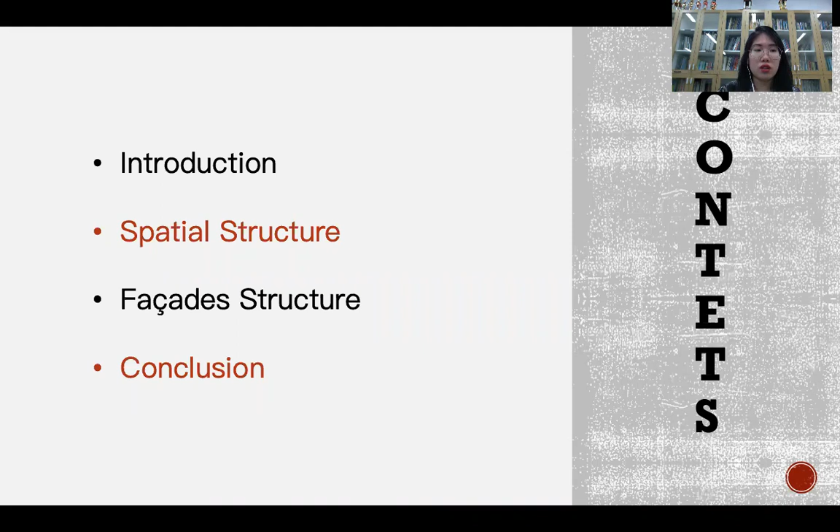Before jumping deep into the research, I would like to introduce some background that established this research. The true meaning of globalization is about increasing interrelation experience. Many have been gradually losing one's own cultural identity due to globalization. Jakarta, as the capital city of Indonesia, is no different. Local culture here has become a sightseeing spot rather than a part of their life. In 2019, the capital city was announced to be moved to Kalimantan on Borneo Island, with one of the criteria being to ensure the local culture.

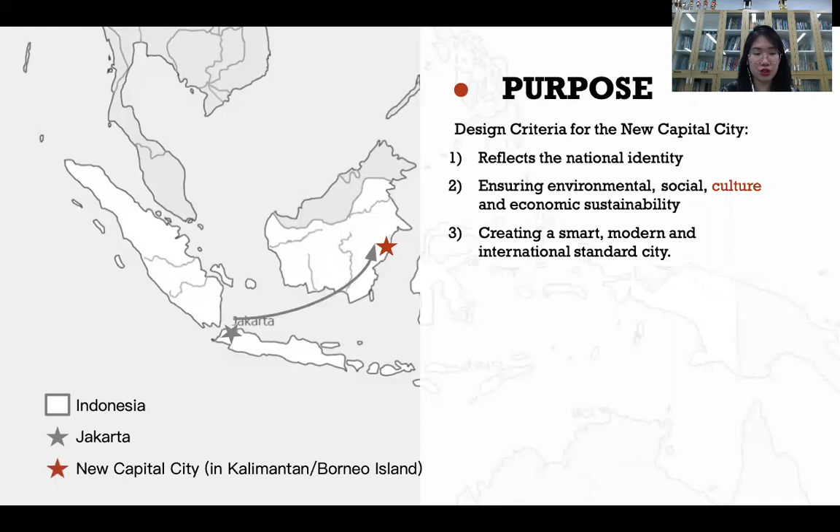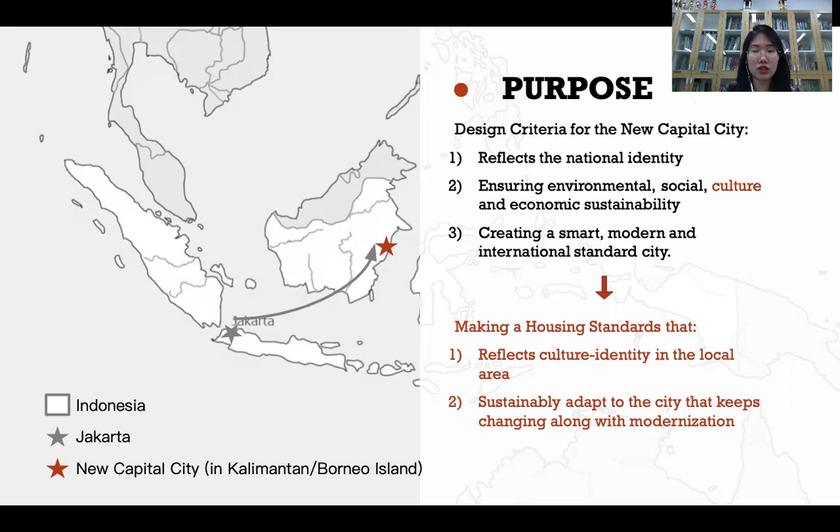With that criteria in mind, the purpose of this study is to find housing standards that reflect cultural identity in the local area, sustainably adapting to the city that keeps changing along with modernization.

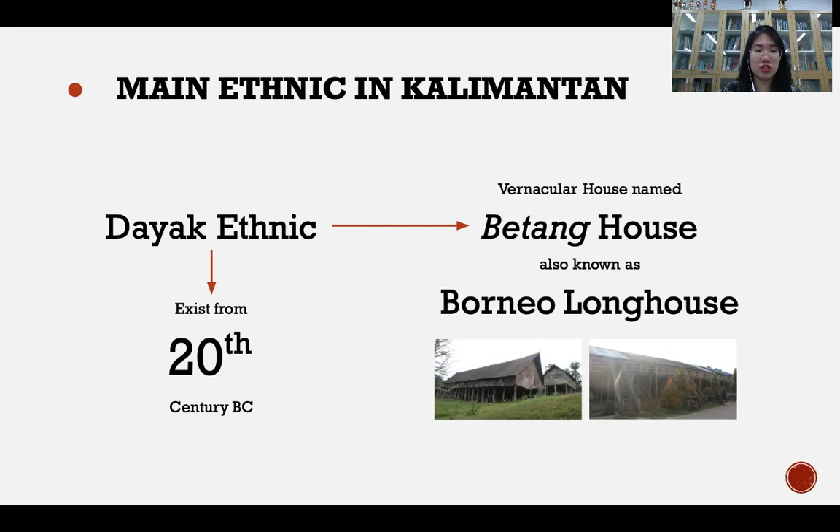For that, we analyzed the vernacular housing in Kalimantan, specifically the Dayak ethnic. Dayak is considered the main ethnic in Kalimantan, as they have lived on the island from the 20th century before Christ, acting as the indigenous group. Their housing is called Betang, or also known as Borneo Longhouse. Just like the name, it is a house in a longitudinal shape and built on stilts.

The vernacular houses will be analyzed based on their spatial structure and elevation proportion to learn the values of the people and how the house develops based on the environment and climate. The results of the analysis will then be considered as housing design standards.

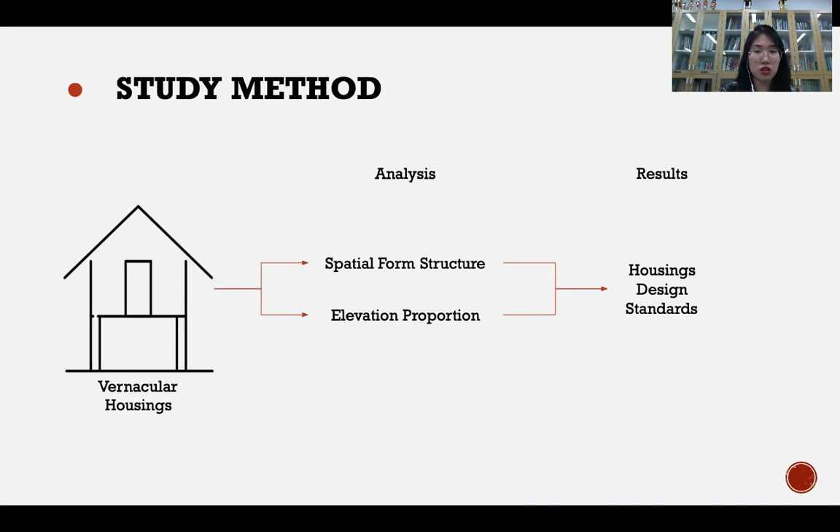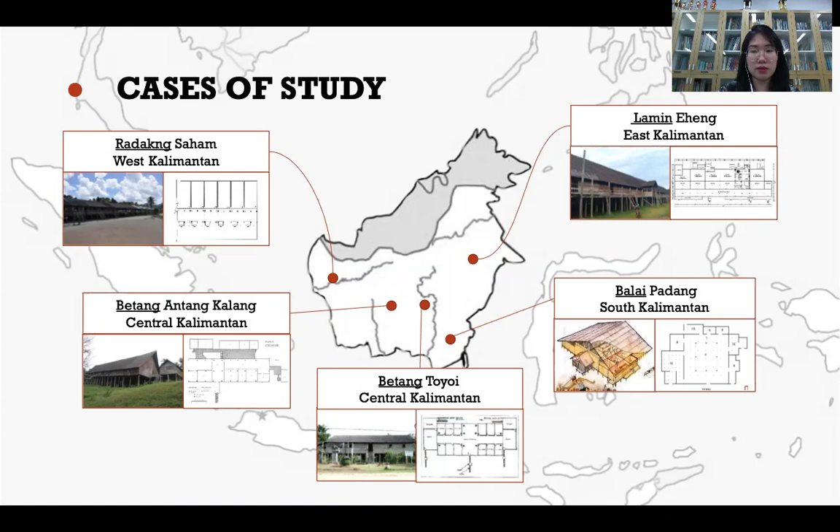For this study, we have 5 cases coming from 4 different areas, which are east, south, west, and central Kalimantan. First is the analysis of the spatial form structure.

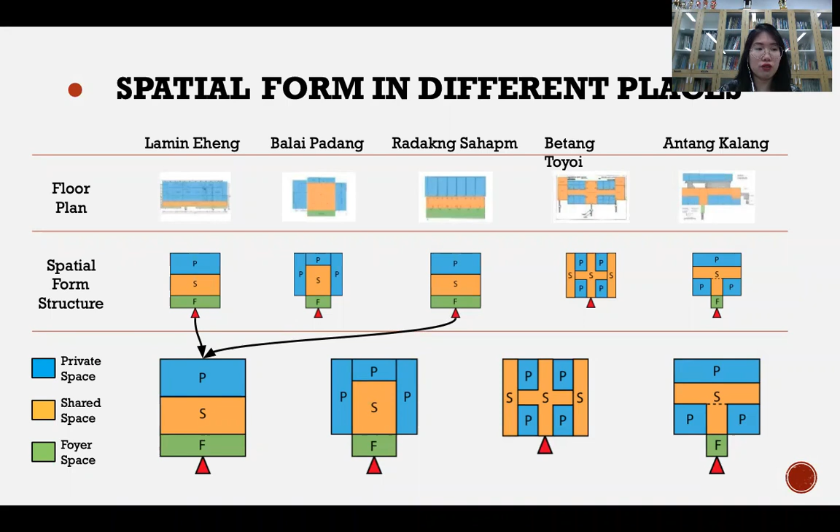The vernacular houses usually consist of 3 parts: the foyer, shared, and private spaces. The way the spaces are connected constructs different formations. Lamin Eheng and Radakng Saham have the same form, obtaining a total of 4 forms. The complicated form is broken into FS and SP relations for better analysis.

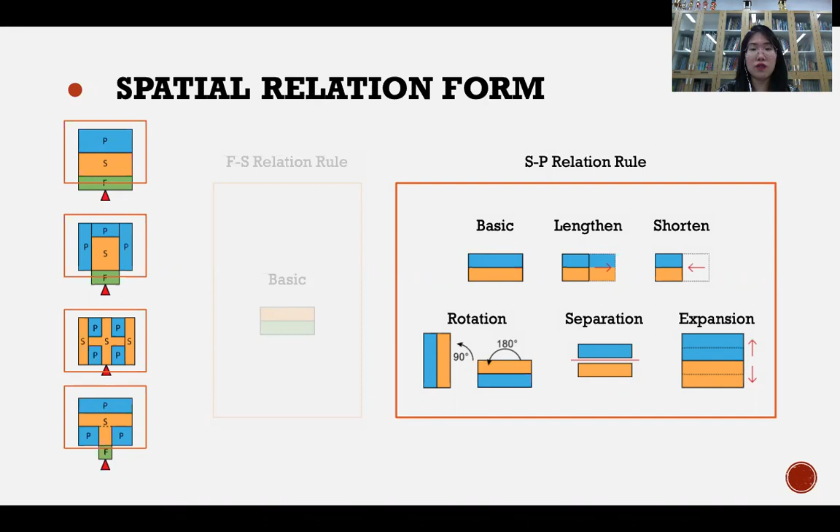For the FS relation, the form is constant—every type has the same basic form rules. As for the SP relation, each type has its own unique form, and these complicated forms can be constructed by adding some of these rules. For better understanding, the SP forms are segmented to reveal the basic form, which determines the types of form structure in these cases.

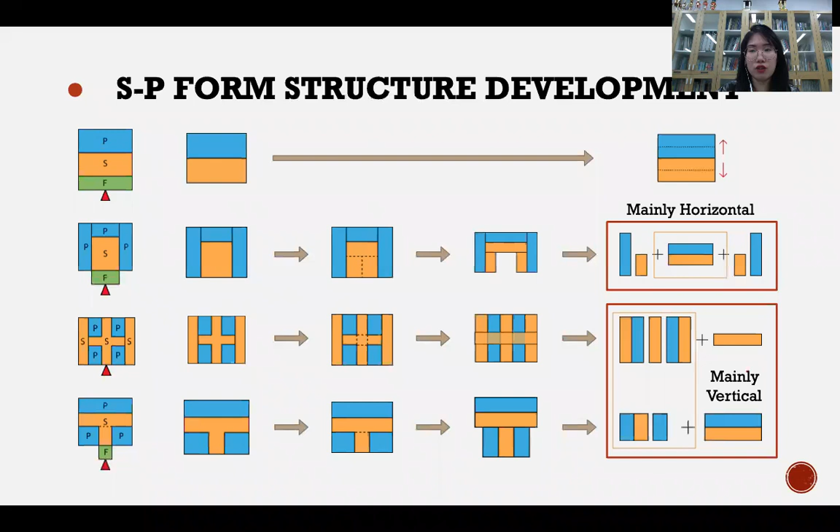Notice that in the second case, the pattern differs from the third and fourth cases. The second is mainly structured by a horizontal basic form with addition of vertical units, while the others are the opposite—mainly vertical basic form with addition of horizontal units. Putting it all together, we obtained 3 different types of form structure.

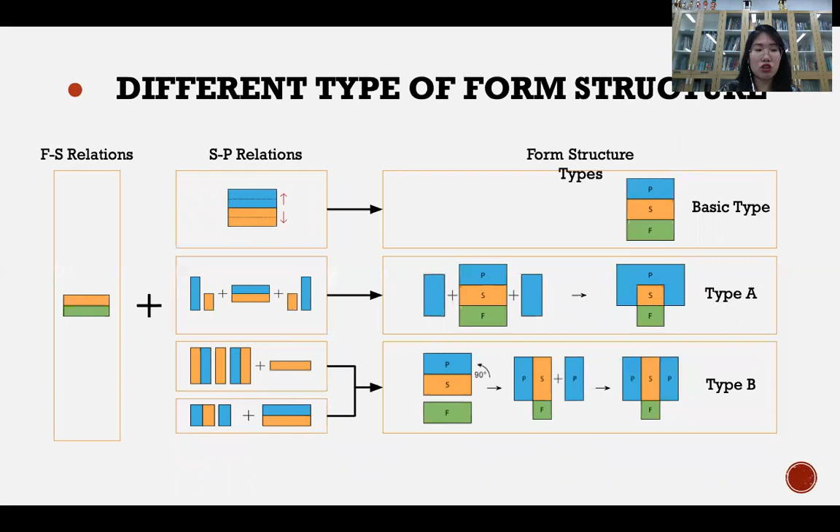The basic type has the simplest form. For type A, the main point is to have a horizontal basic type with addition of vertical units. As for type B, the SP form is based on the third and fourth formations, which have a vertical form with horizontal units. Thus, the third and fourth could be defined as subtypes of B.

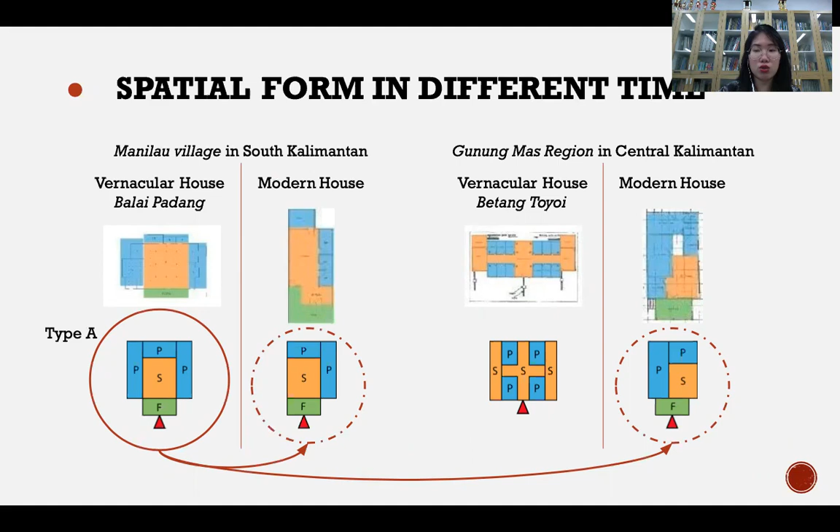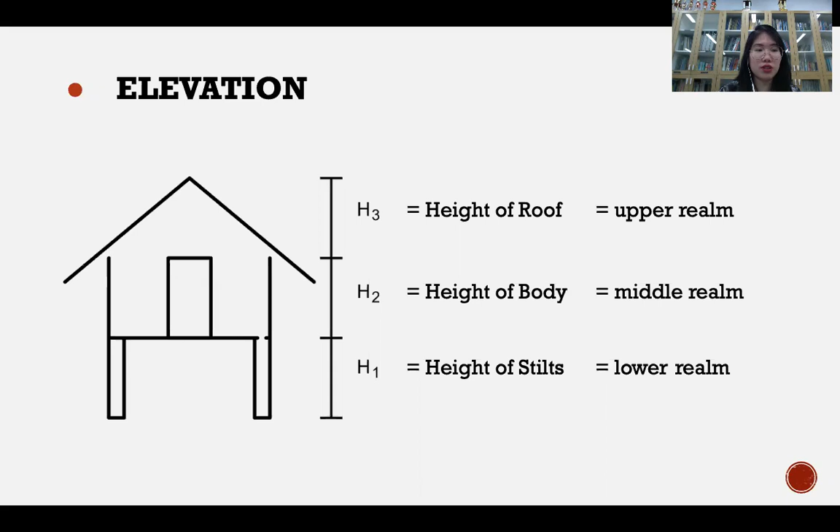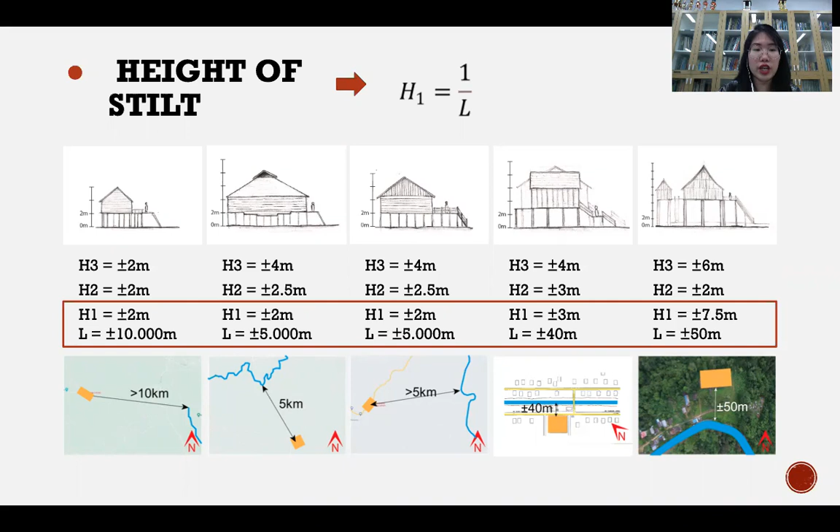The height of stilts is mostly affected by the distance between the house and the river, represented as L. When the distance becomes larger, the height of stilts will be shorter. Hence, the relation of L and H1 has an inverse proportion. But each one has a minimum height—notice that from the first to the third case, no matter how far the river is located, the height of stilts is only as low as 2 meters, equivalent to a person's height.

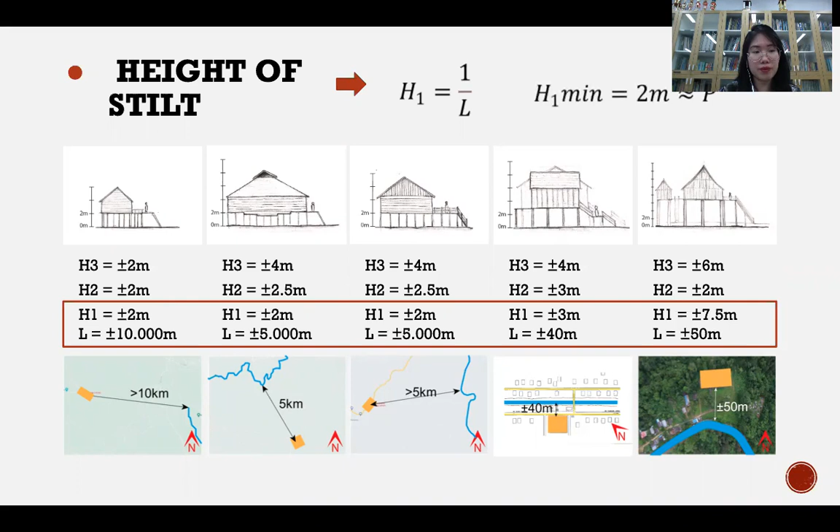Moving on to the height of the body, it is the space where daily activities take place. This is why the height of the body is usually affected by a person's height. The standard height of space for a person to stand is between 2 to 3 meters. Thus, the height of the body in each case runs along between 2 to 3 meters.

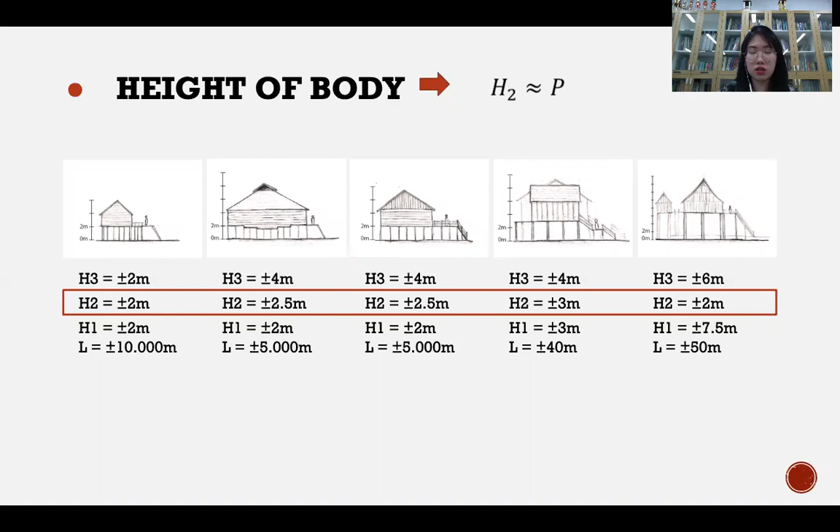Considering the height of the roof, the study doesn't show any clear relation. We know that the slanted roof helps airflow, blocks excessive heat, and more, but the measurement itself doesn't seem to relate to the climate or other parts of the house.

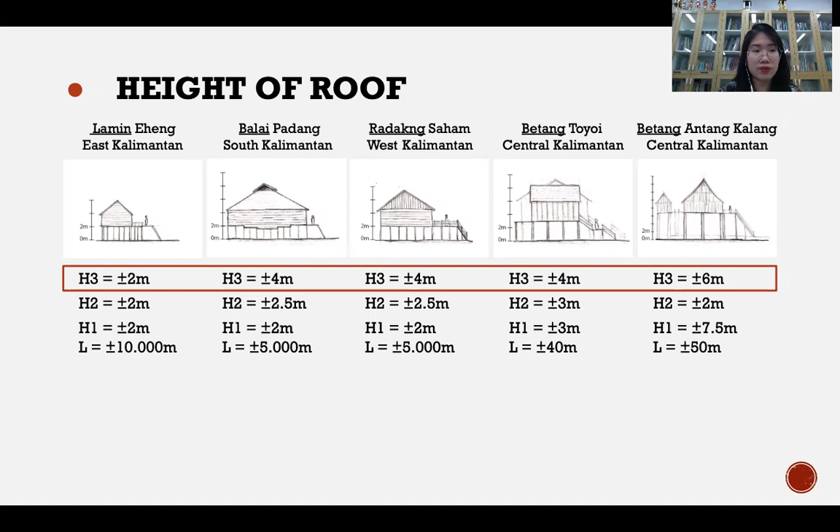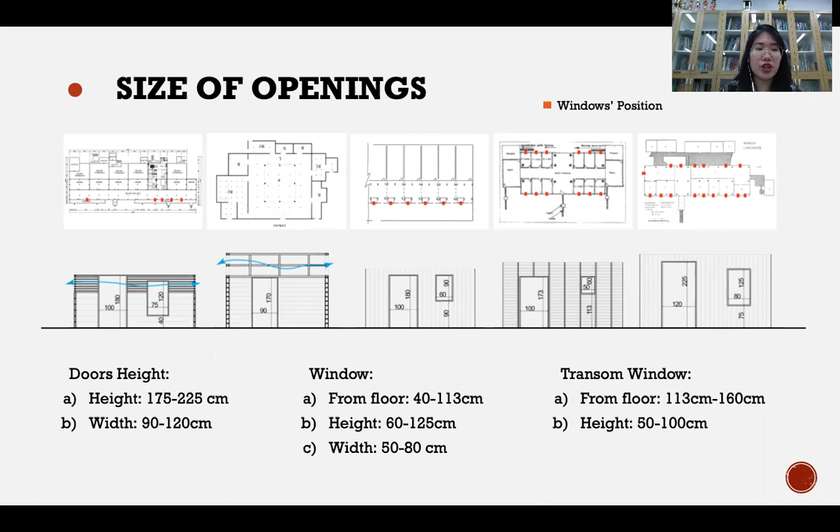Lastly is the analysis of the openings. There are 3 kinds of openings: the door, window, and transom window. The red dot on the floor plan represents the position of the window. Notice that housing with transom windows has few to no windows at all.

Looking at the year the house was built, in the 1800s the size of openings becomes larger as time goes by. Up until the 1900s, the door size becomes more constant and follows the standard width of 90 centimeters.

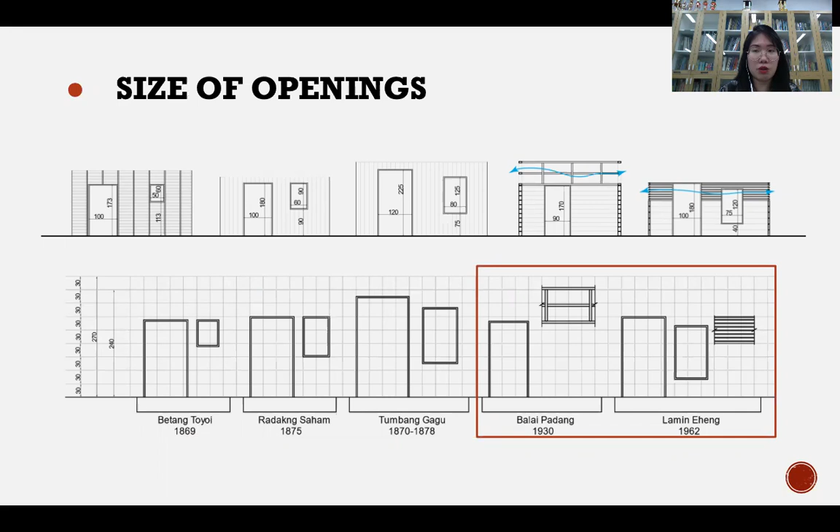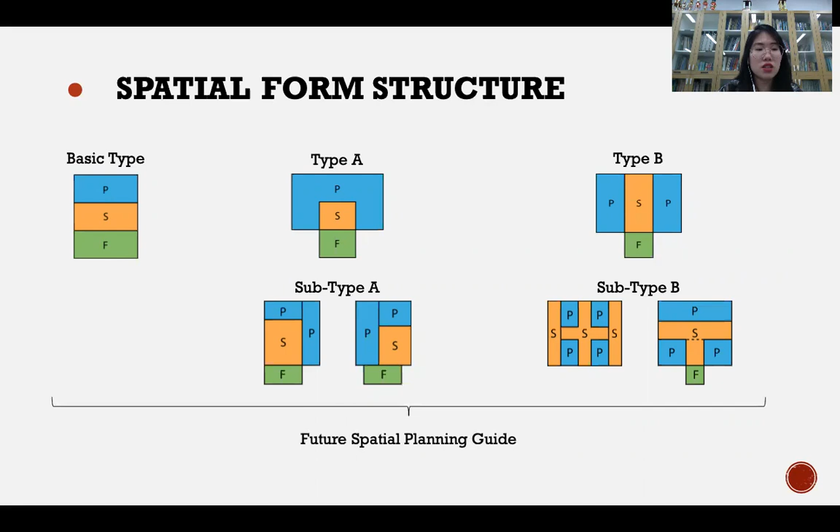So, coming to the end of the presentation, the conclusion of this study: regarding the spatial form structure, although the form of each housing is distinctive from each other, some form structures are similar and grouped into type A and type B, each with their variations, the subtypes. These types could be the guide for future spatial planning.

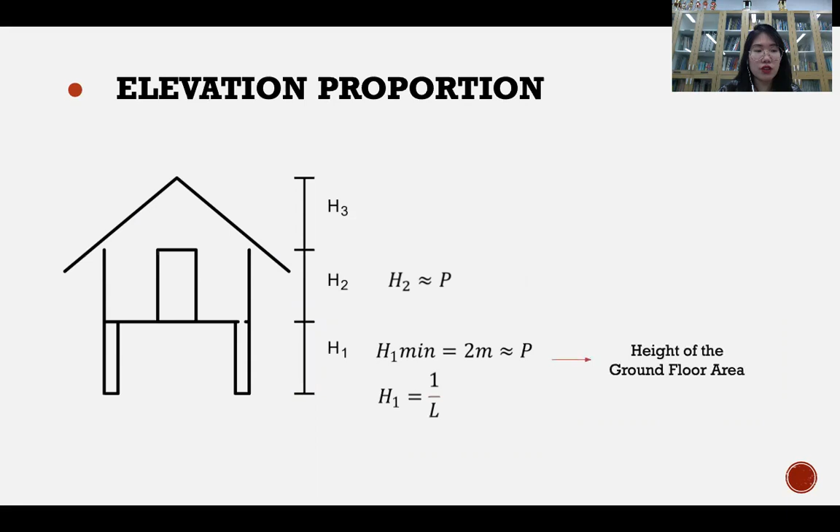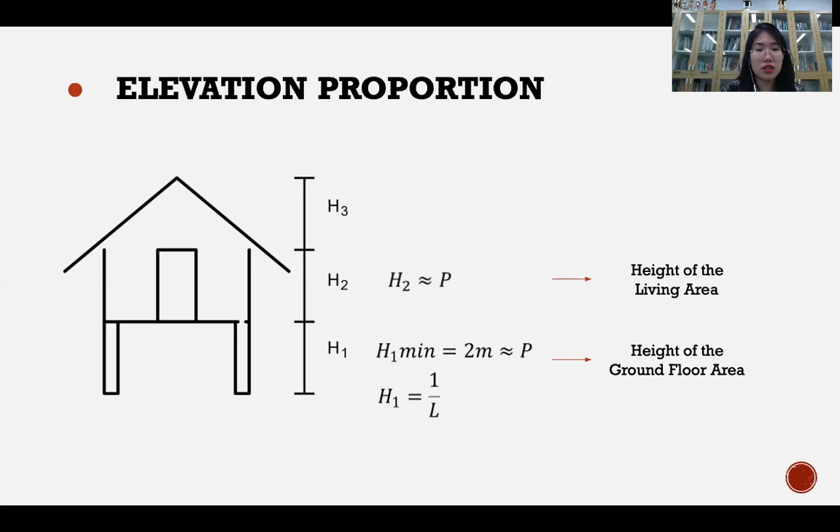For the elevation proportions, the standards that can be used are the height of stilts, H1, and the height of the body, H2. If interpreted, it could be the height of the ground floor or the space height of the living area. Finally, the measurement of openings could become the standard that controls the proportion of the facade.

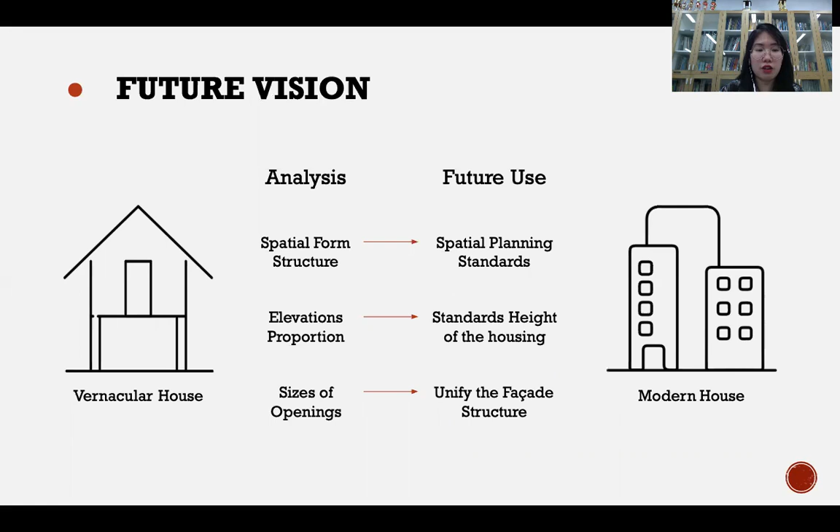In conclusion, these analyzed standards—the structure, the proportion, and the measurements—could become the basic standards for future social housing in the new capital. Thank you for your attention to this presentation.